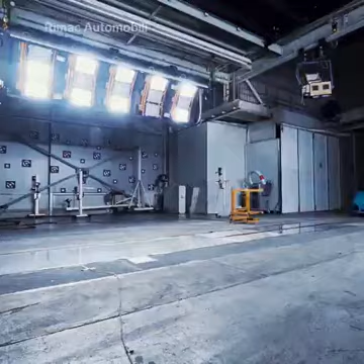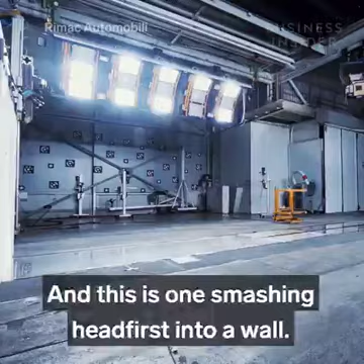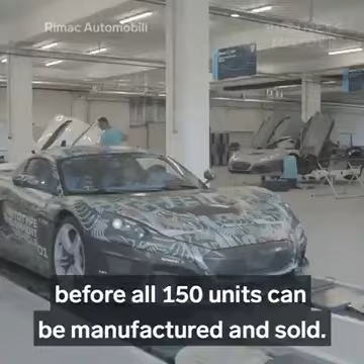This is the $2 million Rimac C2, an upcoming all-electric hypercar that's projected to hit 0 to 60 in just 1.85 seconds. And this is one smashing headfirst into a wall. Just like any other car, the C2 has to be crash tested before all 150 units can be manufactured and sold. But how do you crash test a hypercar without losing millions of dollars?

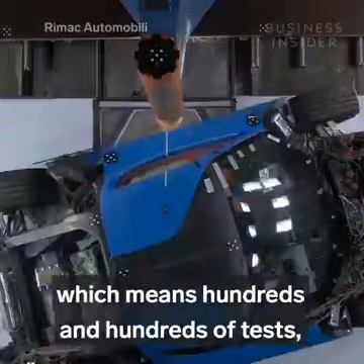Developing a very expensive low-volume hypercar is not that different from a high-volume family vehicle when looking at the safety. So we have basically to do the same tests, which means hundreds and hundreds of tests, or actually thousands of tests. The problem is, with the low-volume production that we have, it's hard to justify to produce many cars in the testing phase.

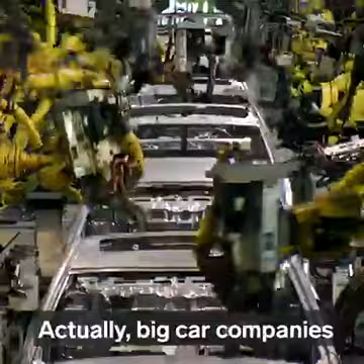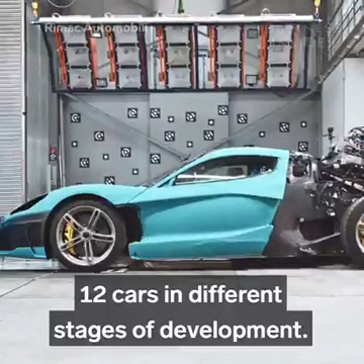Actually, big car companies would produce the same amount of cars that we will produce in total for customers and everything included just for their testing program. We have to condense that to fewer vehicles, 12 cars in different stages of development. So, how does Rimac make just 12 cars last hundreds of tests?

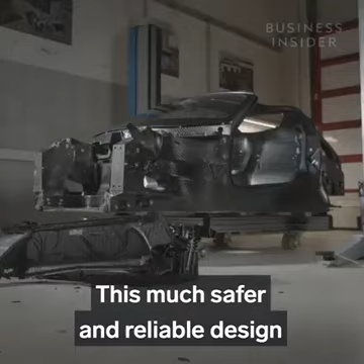The C2 is built around a carbon fiber monocoque. This means its backbone is one giant carbon fiber cell that houses the passengers. This much safer and reliable design has quickly made its way into modern hypercars like Bugatti and Koenigsegg. Rimac claims its monocoque to be the stiffest structure ever put in a road car, tougher than a Le Mans race car and 3 times as strong as a traditional road car.

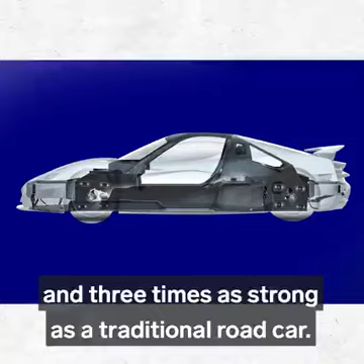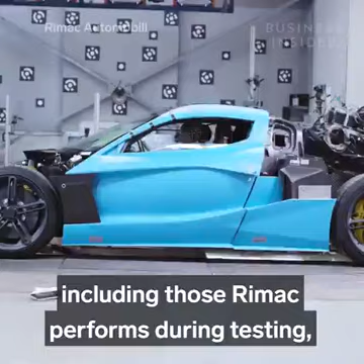The C2's monocoque is surrounded by aluminum crash structures in the front and rear. Crash structures, or crumple zones, are the sections at the front and rear of the car designed to absorb as much of a crash impact as possible before it reaches the cabin. In the majority of crashes, including those Rimac performs during testing, only these aluminum parts are affected and can easily and affordably be replaced right away.

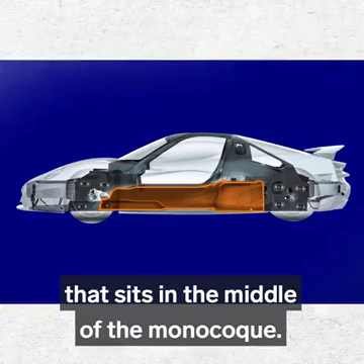The battery pack is also a structural part of the car that sits in the middle of the monocoque. It would require an accident far beyond what's tested here or at a third party to damage the battery. So you might think that maybe the crash test cars cost a lot less.

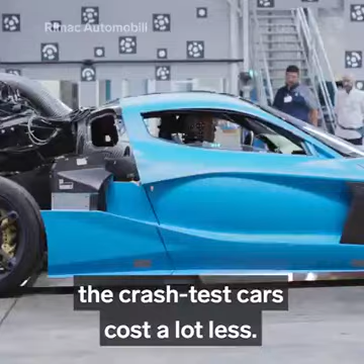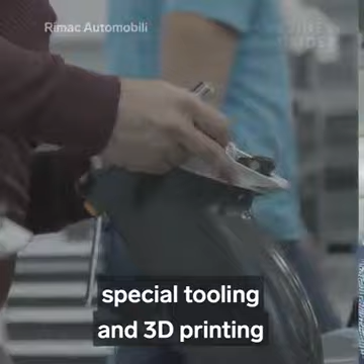Well, actually, as they are prototypes and there's lots of parts made in a way that are not, let's say, production spec, and you have a lot of special tooling and 3D printing and stuff like that, it's actually more expensive to crash those cars and then replace the parts over and over again after every test, that each crashed car is actually more than 2 million.

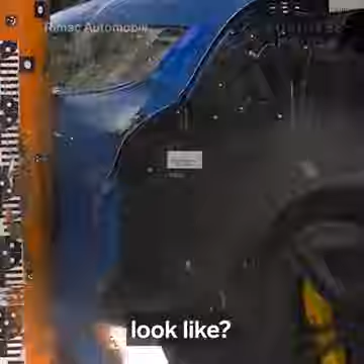So what does the crash test process look like? The first phase is done using computer simulations. Here, the team can really go wild, experimenting with all kinds of vehicle layouts and materials. As a multi-million-dollar car, the C2 requires hundreds of simulations before engineers settle on a design. Once a design for the car's frame and chassis has been chosen, physical tests can begin.

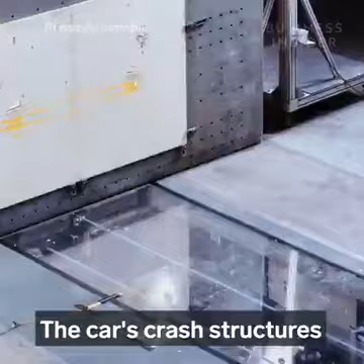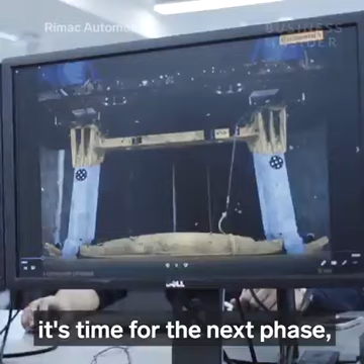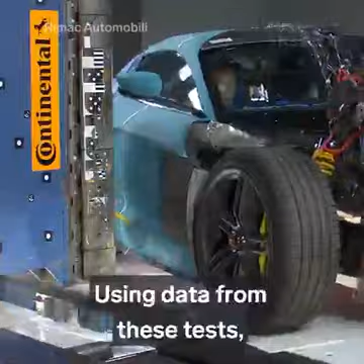The car's crash structures are put on a sled and rammed into a wall. The team looks to make sure the vehicle's build and the materials are suitable. Once enough data is collected and engineers are satisfied, it's time for the next phase, testing prototypes. In the first test, electronic components are replaced with dummy parts of the same size and weight to keep results accurate and costs low. Using data from these tests, the team develops a prototype with a fully functioning drivetrain.

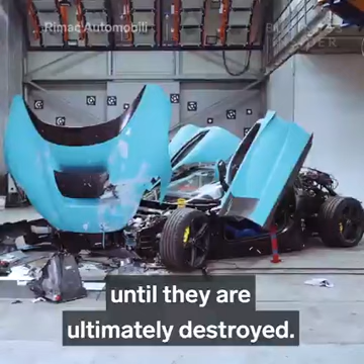These cars will be crashed at higher and higher speeds, from 10 to 50 miles per hour, until they are ultimately destroyed. Rimac uses prototypes that only have the front or rear bodywork of the car attached in order to save time and money. These prototypes are what engineers hope to use for the final production.

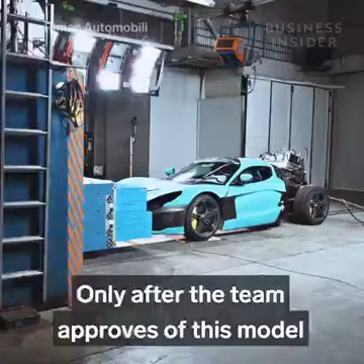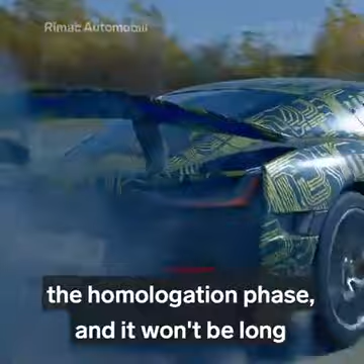Only after the team approves of this model can they begin homologation, where fully completed cars are tested in front of third-party authorities, who decide whether the vehicle meets safety standards. By now, Rimac has reached the homologation phase, and it won't be long before the C2 is street ready. But no matter how safe and technologically advanced Rimac can build the C2 to be, watching a $2 million car get smashed to bits will always be painful.